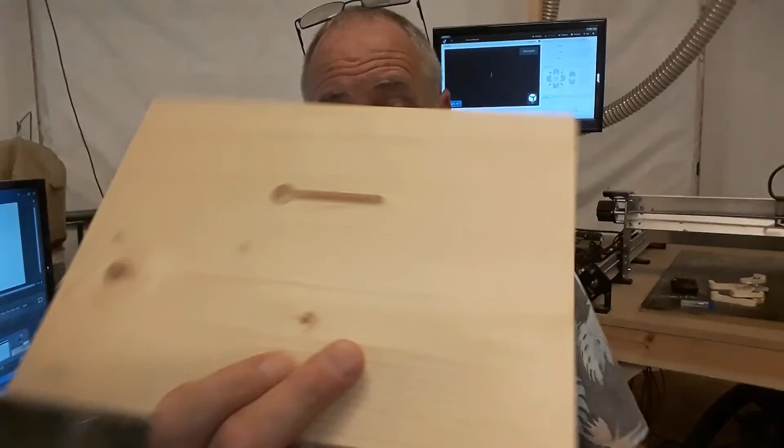If you have a CNC router and you make signs with it that need to hang on the wall, and you need to learn how to make T-slots like that, then that's what you're going to learn in this video today. I'm going to teach you exactly how to design this up and how to generate the toolpath for it, and I'm going to teach you how to get the T-slot cutter into your tool library. You have to get this set up in a separate way. If you don't do it right, you are going to have problems if you try to do this without doing what I am going to be teaching you. And then we're going to take the project and we're going to slap it on the router, and I'll show you how to set it up like that.

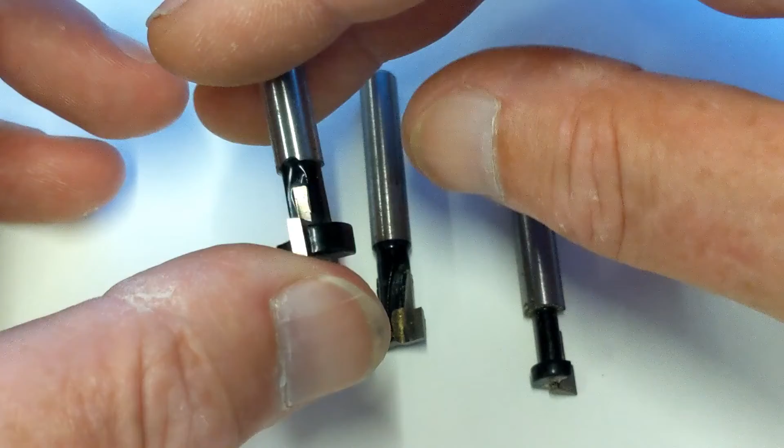Now, there are a lot of different types of T-slot cutters, but for all intents and purposes, we are doing everything with this style here. This came as a set of 3 off of Amazon, and they are ultra cheap, like $10 for the set of 3. They're not high quality cutters whatsoever. These are what I consider throwaway bits. So what you'll notice when you do these, it'll cut a little bit rough, it'll just sound rough. However, if you want to step it up a notch, you're going to be spending $100 or more. So because these are so difficult to find, I am actually talking to my supplier now to actually design these up.

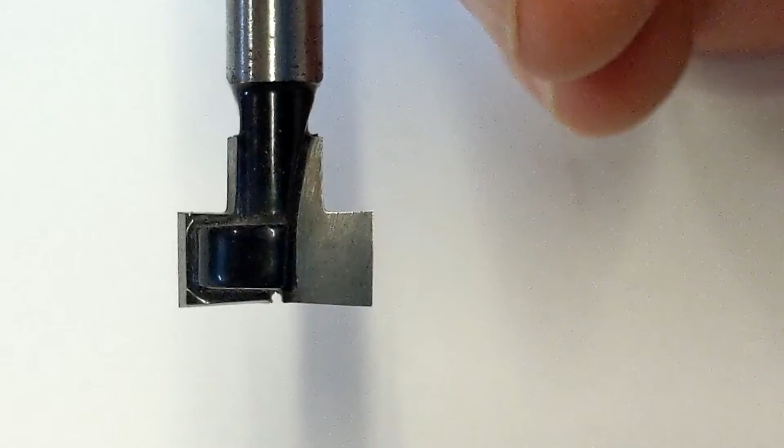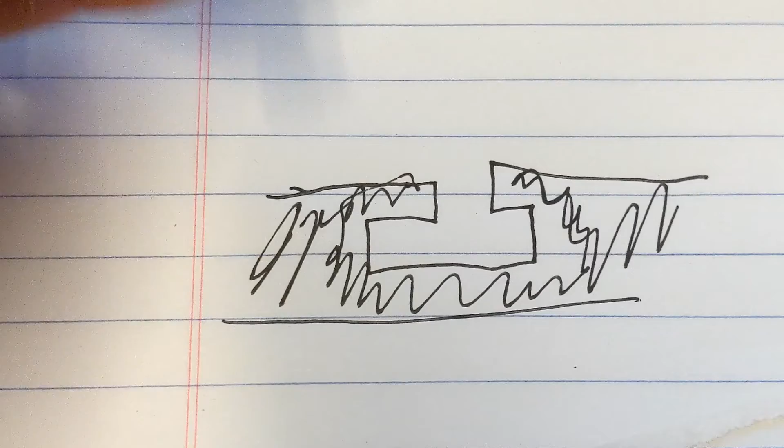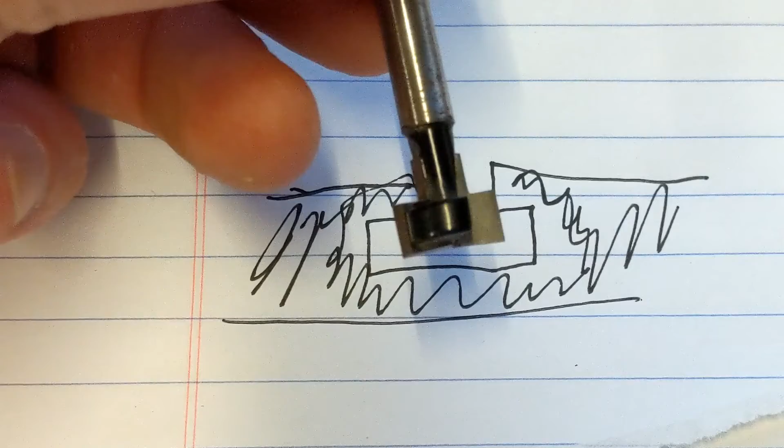Here's the style of this bit. You can see that there are 2 flutes on this bit - there's a flute over here and a flute over on this side. And there are 2 cutting diameters. We have the bottom of the slot, or the wide part of the slot right here, and then we have the upper part of the slot right here. And this is what the slot will look like when it makes this cut. This is considered a cross section of your material, so the scribble area is your material, and that's the T-slot that's been cut out by this bit right here. So it comes down at some point, plunges down to the material, then drives across or cuts across the material, and then it's going to come back and pull out. And that's the way we're going to design it.

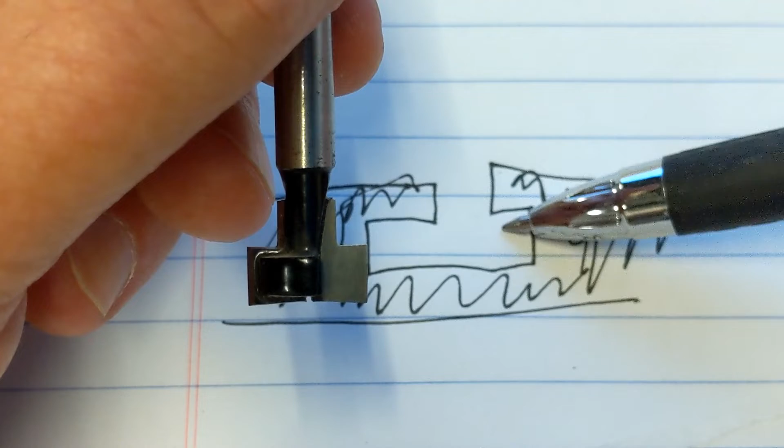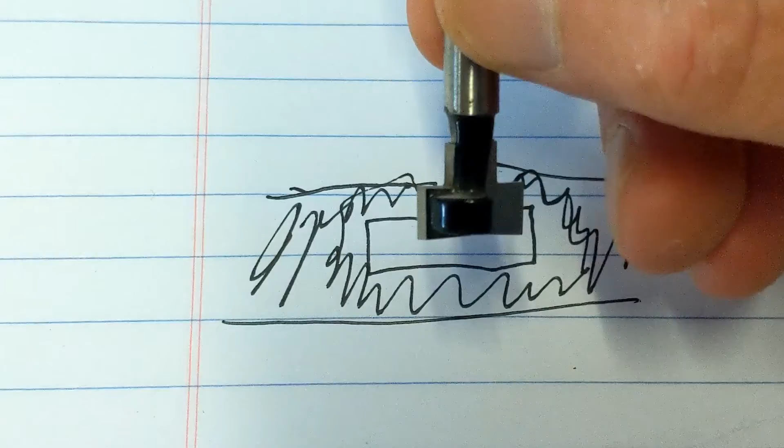But also this is the way this project looks. So what I want to make sure of when you are doing projects like this is this depth from here to here cannot exceed the overall depth of the cutting blades. So you want to make sure that if your cutting blades are, let's say, half of an inch, let's just measure this one up and see what this is. We are roughly right there.

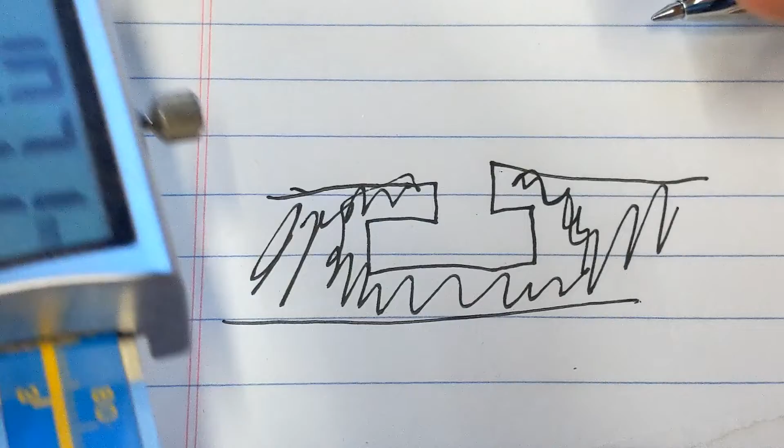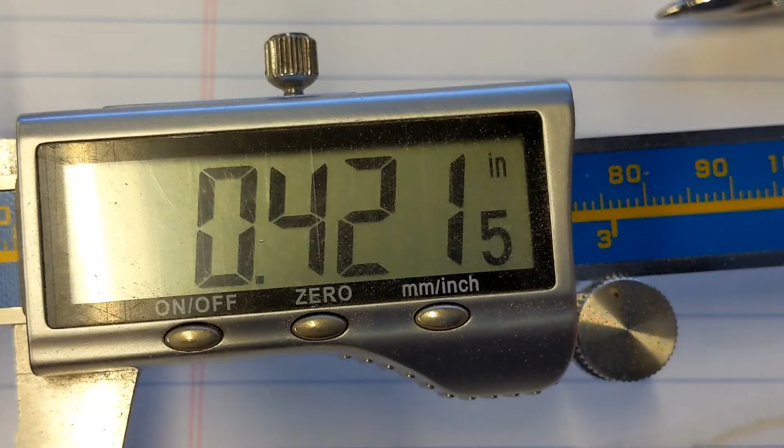So that's 10 millimeters or 0.42 inches. We don't ever want to go past 0.4 inches. This one I always set to 3/8 of an inch deep, or 0.375. That would be about 9 millimeters deep. So that's what we're going to be creating.

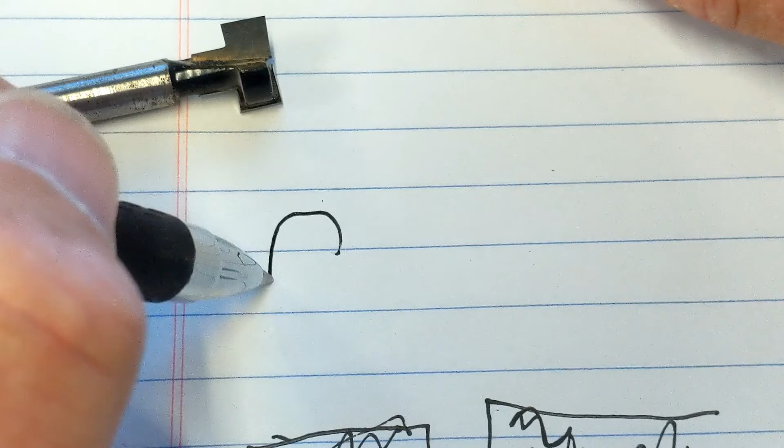Now, if you look at it from the top view of your material, you are going to end up seeing something like this, just like we showed you on that piece of wood. So the bit will come down here, it'll go across there, and then it'll come back and pull back out.

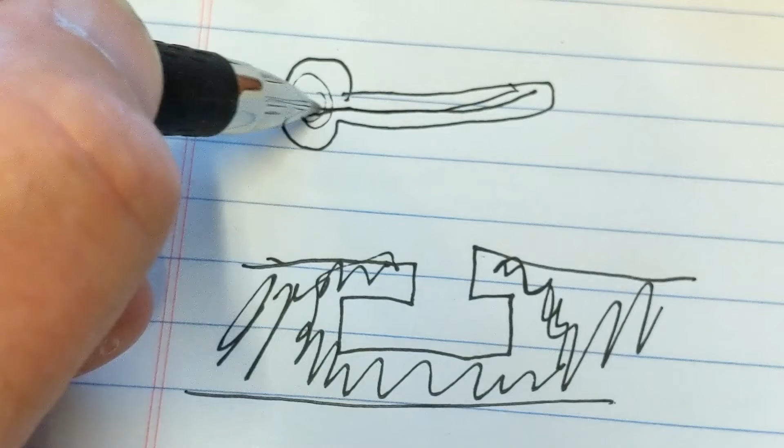Okay, so we're going to dive into the Vectric software and we're going to design it up. It's super easy. And then we're going to get into the G-code, and then I am going to tell you how to get hold of the G-code, and you'll know exactly how to set this up from there.

We are in Vectric, and I just want to remind you, this will work in all variants of the Vectric software, the Cut2D, the Pro, Desktop, Aspire. As far as other softwares go, like Easel, Carbide Create, I honestly don't know. However, the G-code file that you will be able to download, you can work with that and adjust it the way I tell you.

With that G-code file, I'm going to tell you up front, do not download it until you understand what I talk to you about later on and some of the cautions I want you to take.

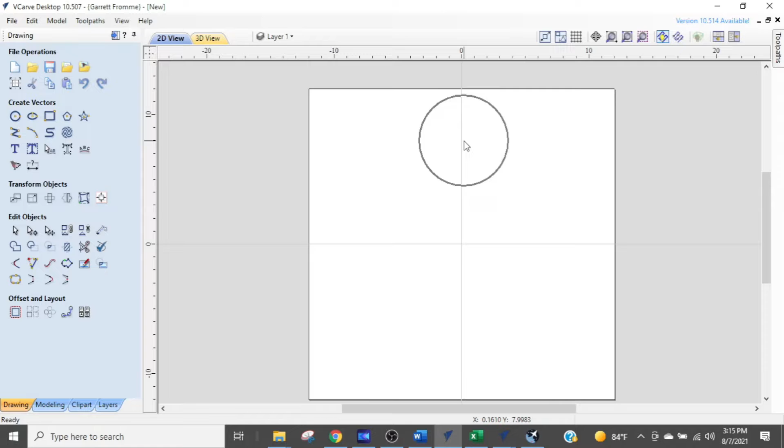Alright, so let's design our slot. Essentially the way we're going to design our slot is we are going to design it off the middle of a 0 point. For all intents and purposes, we're going to create a 0 point on our project, or a crosshair. And that crosshair may be up here on the project, but for the intents of this software, we need to make it where our XY0 meets or intersects. So when you're setting your project up, you want to make sure that you are set up with your XY datum position in the middle.

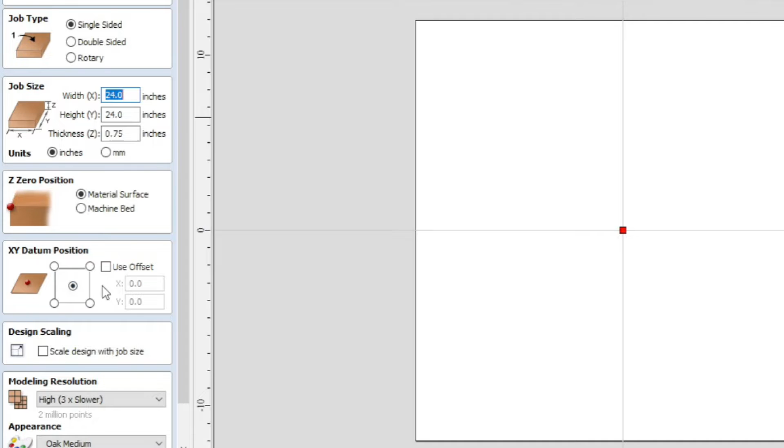Now this project is 24 by 24 by 3/4 of an inch. It doesn't really matter, that's just what I have it set at. Your sign may be any size. It doesn't matter. Use this method to make it as simple as possible.

Okay, so let's just say we want a slot that's going to be 2 inches long. What we're going to do is grab a polyline. That's this tool right here under Create Vectors, the one that looks like a little zigzag. And we're going to select that, and that's going to put us into draw a straight line mode.

Now before we draw anything, we want to make sure our snaps are turned on. Just turn both of them on, and we are just going to let it snap to the horizontal line. You see my cursor, watch it - it has a little plus and a zigzag and some numbers. And when I get to the line, it's going to change into a bullseye. That means we are snapping to that horizontal line.

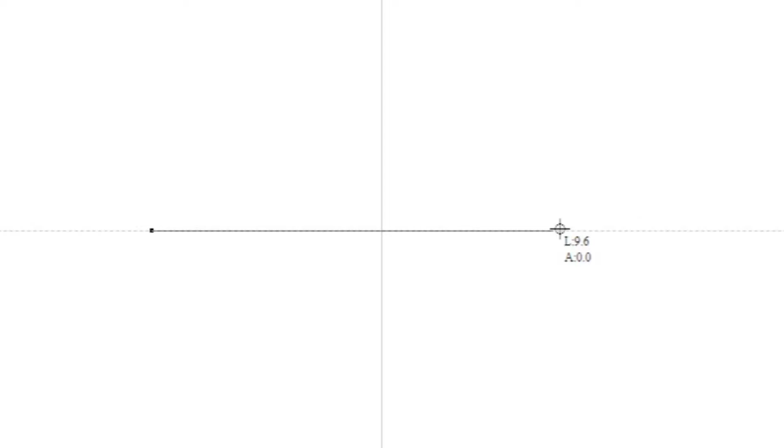So while we have the bullseye, click your left mouse button once, and now it has grabbed a point. Then we are simply going to pull straight across while that line is straight. You don't want it like that - you want this to be snapped onto the line. So you see my cursor again has that crosshair. You want that crosshair to be there. On our keyboard, we're going to type in 2 and then enter. And what we just did is we created a 2-inch line.

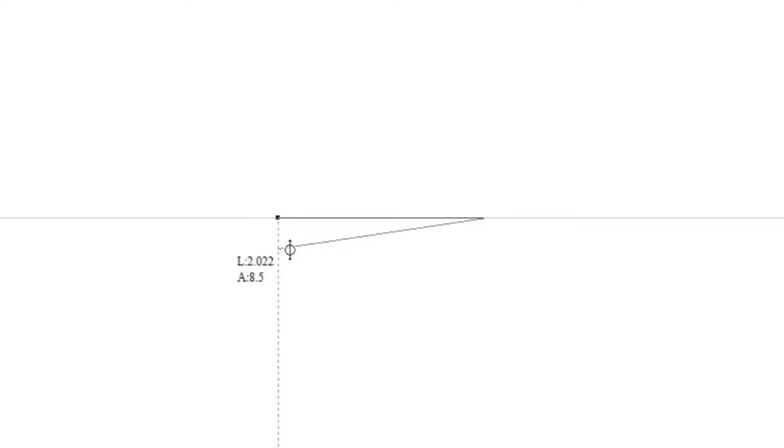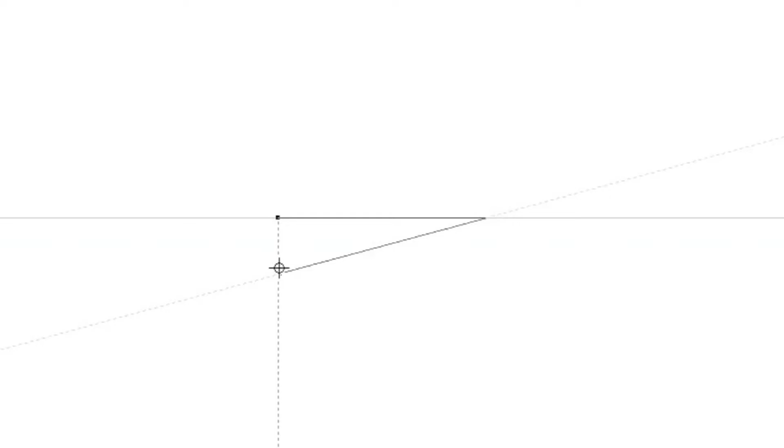Now we're going to zoom in a little bit to this line, and we are going to move backward to the other one. It's going to turn into - you're going to see we get changes in our cursor. What we want it to do is, first of all, you see just above my cursor, that line has a little black spot on it. That means it's snapped to the reference of the end of that line. So you can see I have a dashed line there. That dot indicates that we are perpendicular to that line right now.

Wherever we click, we are going to be on that dashed line. But what we want to do is be all the way on the line there. So we want to turn back into a bullseye, and we're simply going to click right over that. The other way you can do this is just come back over it, type in 2 again, and enter, and now our line has come back.

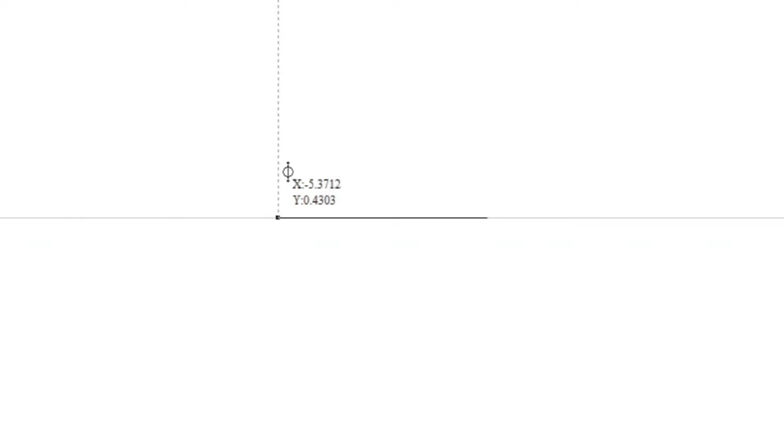Now you'll notice something, that the software by default stopped drawing a line. What we have is basically a line that's drawn over top of itself. Vectric for some reason just quits at that point when you do that, which is okay because that's exactly where we want it to quit. So now we're going to close this box, and we're going to come from the upper right or lower right, and we're going to hold our left mouse button down and just create a window so we can drag across that line and let it go. So you see now that that line has been highlighted.

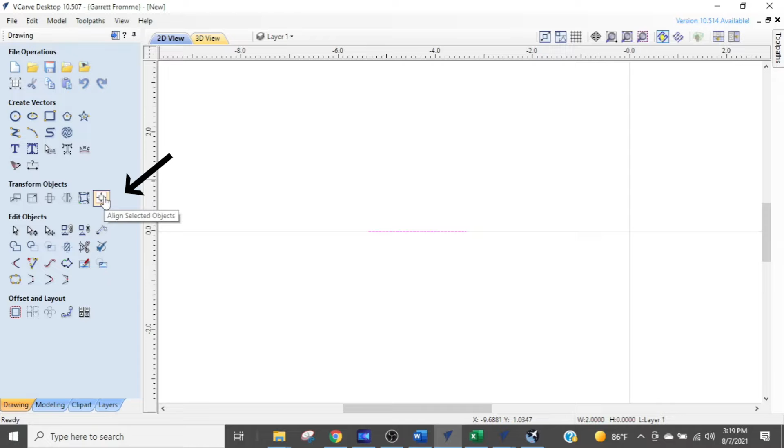What we want to do now is center that line on the 0 point. Very simple to do. You go under Transform Objects and select the last icon, which is align selected objects, and then pick the upper middle one, which aligns it to the center of both up and down of the project.

So we click that, and the line has now moved over into position. Close that, and our T-slot line design is complete. It's that simple. I'm going to run through this one more time.

So what we're going to do is just delete that. Right now you see it's highlighted purple. I'm just going to hit the delete button to eliminate it, and I'm going to do it a little bit differently this time.

We're going to grab that polyline again. We're just going to come somewhere here in the middle, and we are going to snap with our left mouse button. And we're going to come across so we have that dashed line that goes all the way through the line and goes off to both sides and ends of the screen.

We're just going to come over that way. We're going to hit 2 and enter, and then we're going to come back the other way, and you can see both - there's a dot here and a dot will be here, and we're just going to go past them. We're going to type in 2, enter, and that line is done.

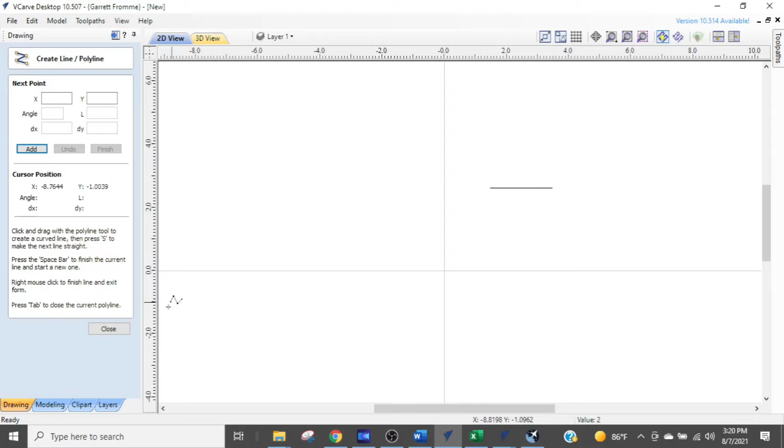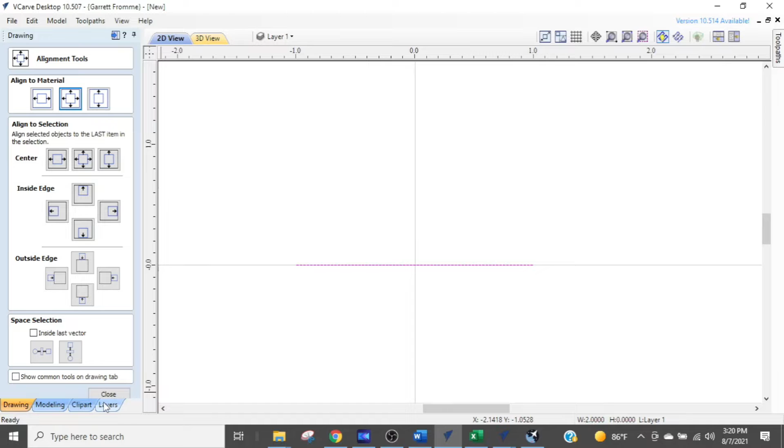So we can either close this or hit the escape button, and I just hit the escape button. Now we're going to highlight that line, and we're going to go to align selected objects under transform objects. Click that, and we're going to click that center button, and now our line is in position right here. So we'll close that, and we are ready to turn it into a tool path.

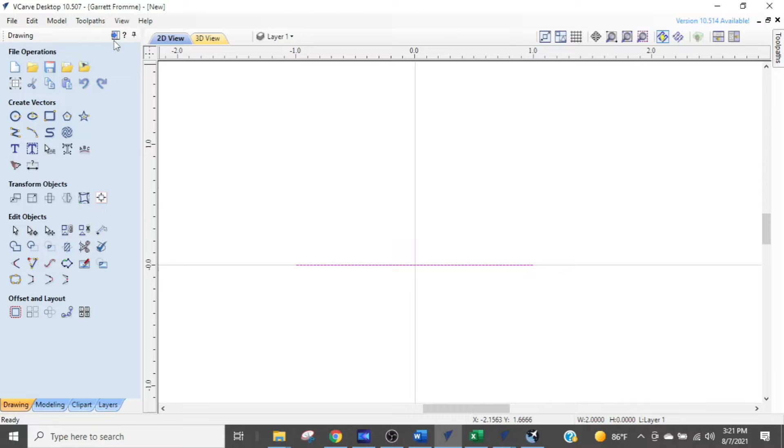So what we're going to do is we're going to switch to tool path. One of the things I want to warn you about right now - I've done many one-on-ones with people who are just getting into this, and they often are in the habit of, instead of switching from design mode, which is to your left, to the toolpath mode, which is on the right, by virtue of this switchover button right here, they use this tab, this pull-out tab right there.

Now this is meant to be there for a temporary fix on something. I strongly recommend that you don't do this, because you have two completely separate elements exposed at the same time. You have toolpath generation, or CAM, computer aided machining, and then you have CAD over on the other side, computer aided designing. They're two completely separate animals.

So I'm going to strongly recommend that you do not use this tab up in this upper right corner, but rather use this blue arrow to switch out of the CAD side and into the CAM side. So I selected that button, and you see on this side there's another blue button there. You click that, that will take me back to the CAD side. So I'm going to go back to CAM.

And you can see our line is selected. So what we're going to do is cut this on a profile. Now before we even run this tool path, we have to set the bit up in our tool library.

T-slot cutters are set up a little bit different, and they're a little bit interesting. If you don't follow along with this and try to figure it out yourself, you'll probably get a little confused. So we're going to set that up right now, and you're going to learn how to set up T-slot cutters in your tool library. So let's go.

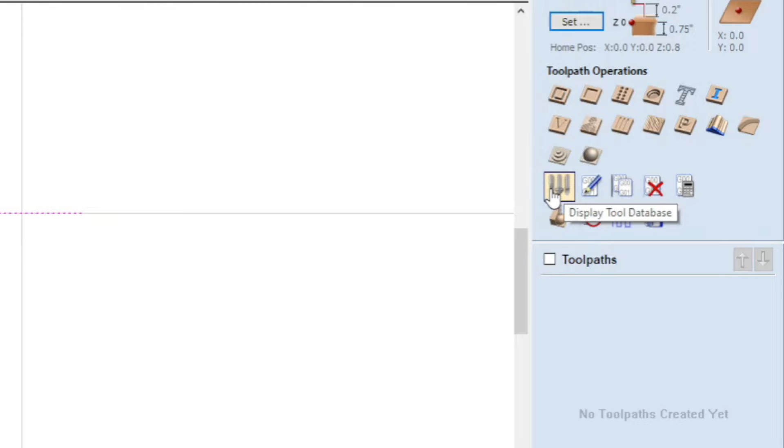So we're going to go to our bit library, which is this button right here, and it says below it display tool database. So select that, and there is our tool database. One of the first things we want to do is set up our T-slot cutters.

Now there's a little thing I want to show you that's going to make you question things, but once you understand this, you won't question it anymore. I'm going to just select an end mill here, any one, and you see it comes up with this field called tool type. Next to it is a pick box or drop down box, and inside it talks about all the different router bits, the different types, but there is no T-slot cutter. So we have to come up with an alternate plan to solve this, so we know that we're dealing with T-slots. We are going to treat a T-slot like an end mill.

So I'm just clicking out of that because I don't want to mess with that one.

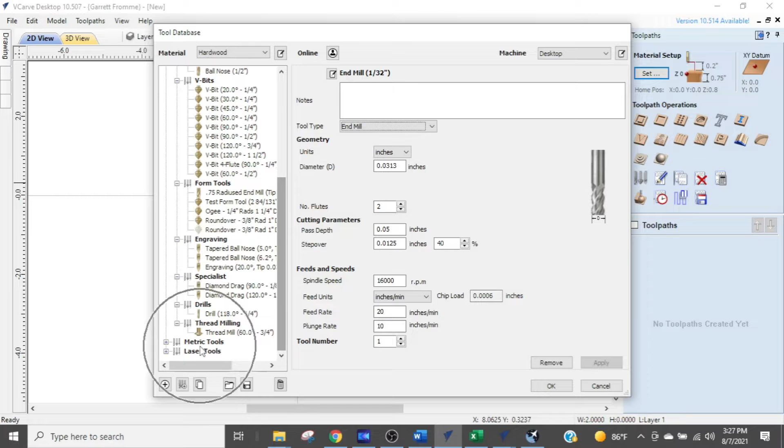What we're going to do is go up to the top field where it says Imperial Tools in inches. If you're in metrics, you'll go down the list until you get to your metric tools down there, and you'll do the same thing. We'll select that, and we are going to hit the second button that says Add Group.

When we select that button, if you watch up here, it's going to give us a new group. I'm going to push it once, and now it's titled new group, and added that, and there's nothing in it. You see under end mills, there's a whole bunch of end mills here. Under new group, there's nothing, and it says new group.

So we're going to simply come over into the name field and change that to Tslot Cutters. And then we're going to go down to the bottom and click the apply button. And now we have just changed the name to Tslot Cutter.

So now we need to add a bit into it. That's very easy. All we have to do is grab a bit from anywhere in here, and we are just going to select the 1/4 inch end mill. We're going to use those defaults, and we are going to come down to the bottom and duplicate that bit. So I'm going to select duplicate, and now it's just made a new one.

What I'm going to do is simply drag that up under Tslot Cutter. I just click and drag, and now it's there.

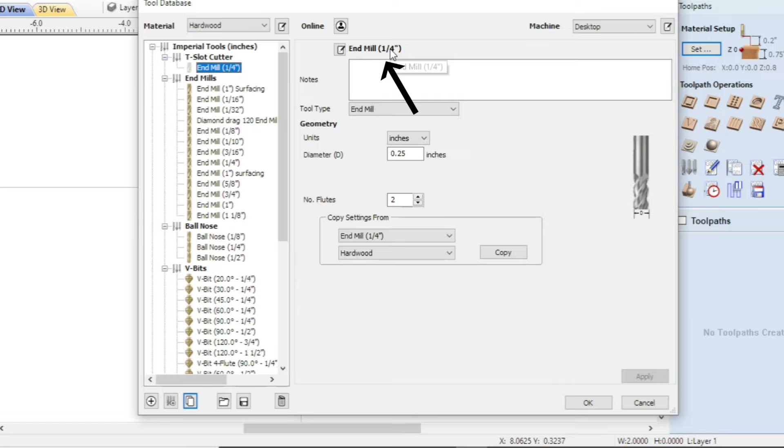So we're going to start right off at the top and get this set up. First of all, we're going to change the name of it. So where it says end mill 1/4 inch, we know that our cutter is a 1/2 inch by a 1/4 inch. So it's a 1/2 inch wide by 1/4 inch thick.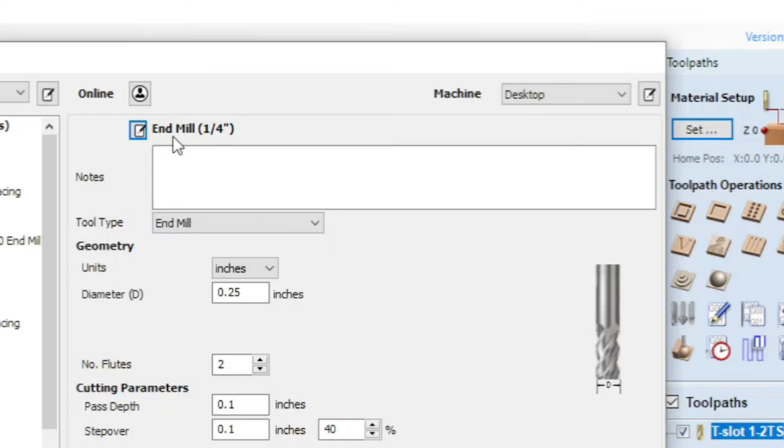So in order to change this information, we need to select this little box right here. This will allow us to edit this text so we can change it to Tslot Cutter and what other information that we want it to say. So when you click it, you're going to get this dialog box, and we are going to change it.

So basically we're just going to say it's a 1/2 inch Tslot Cutter, and what we want to do is, you see where it says units, we want to leave that alone. We are going to go outside of the diameter area, and where it says tool type, we're simply going to overwrite that. We're going to delete that in the brackets, and we're going to say T-slot. And we're going to say OK.

And now it says Tslot 1/4 inch. So everything is perfect right now. But our T-slot is actually 1/2 inch. So you see where it says diameter here, we have a 1/4 inch.

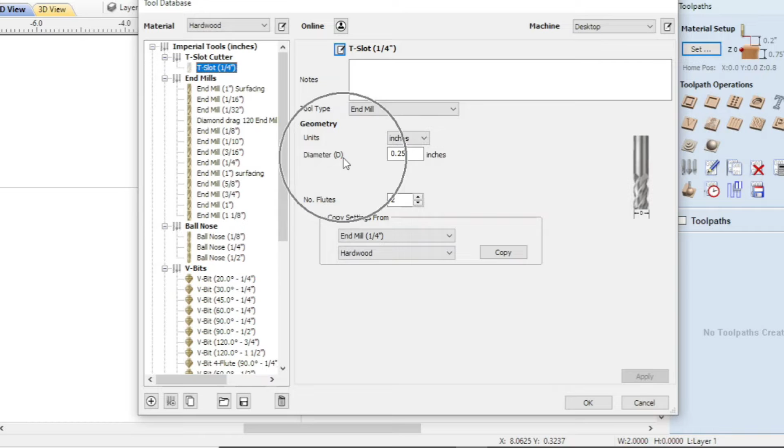We're going to change that to 0.5, and click out of it. And now that number is changed to Tslot 1/2 inch. Number of flutes is 2. We're going to just click the copy button. What that's going to do is take that original 1/4 inch end mill data that we had, and it's going to punch it into this lower set of data fields.

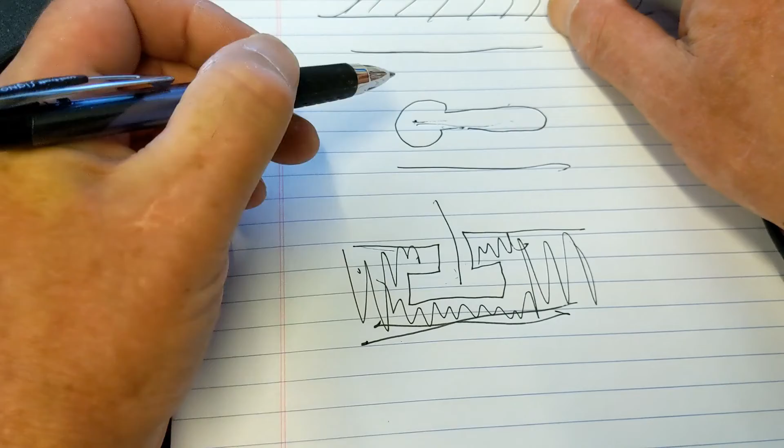So we're going to change things around a little bit. The first thing is, how deep do we want this Tslot Cutter to go? Now remember, we have to actually dive down in and move across the project and then come back. Like here, we have to go down into the project, go across, and then come back again.

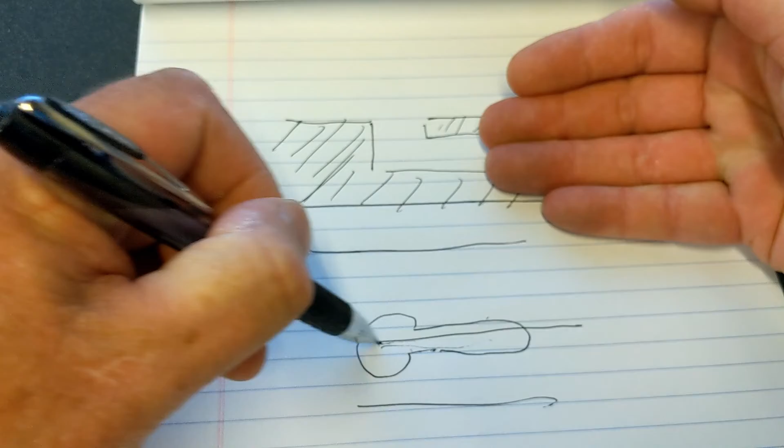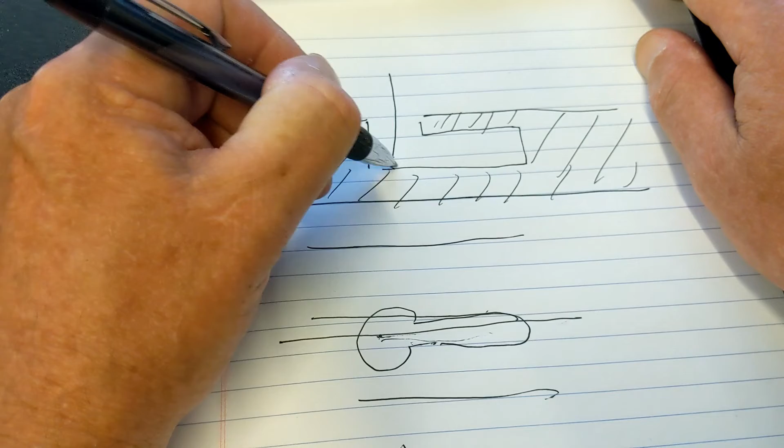So we have this kind of contour inside our project. If we were to take this and turn it upward like that and cut it in half right across there, or roughly there, we'll cut it right across there. This is what we're going to have. So that bit has to come down to here, to this level, the bottom of the slot, move across to some distance right over there, and come back again and come out. So we have to figure out what is this depth from here to here.

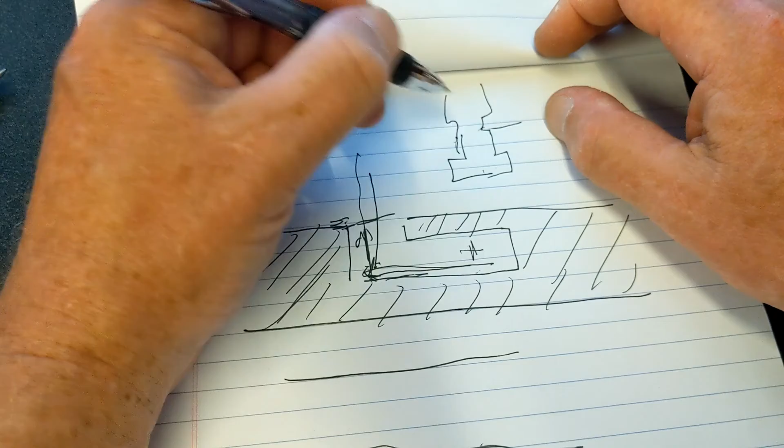Now with the bit that we are going to be using, it is like that, and this is the cutting edges. That is a 1/2 inch. So we're going to go 0.375.

So what we have to do is fix the pass depth so that we get that 0.375 in one shot. For this cutter, the pass depth is going to be 0.375. We want it to go to the full depth in one time.

Now step over, we are not even going to be referencing step over on this, but I would set that at 1% just to be on the safe side, because we won't be using that function. But if you accidentally have this bit selected, it'll only step over just a tiny bit and not cause any issues. Now the spindle speed for this bit is going to be 16,000.

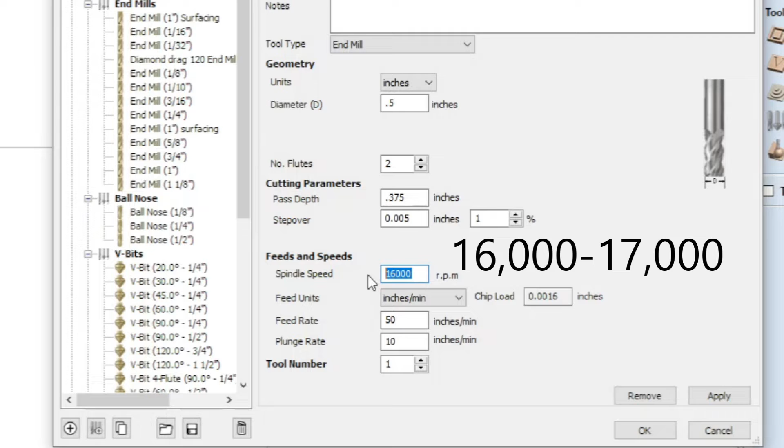or 17,000. If you have a Makita router, then it will be approximately 3 on the dial. All right, so feeds in inches, we are in inches per minute. You would be in millimeters per second. I will provide all this feed and speed data down below to have your thing set up, and we'll add that to the feeds and speeds tables in the next release.

Okay, for feed rate, we are going to keep that turned down a bit. We are going to go to 30, and the only reason I'm keeping that down is because this is not a good cutter. So it's going to cut a little rough. Normally I'd probably cut it at about 60 inches per minute.

And then the plunge rate, we want this to be a little low. So 10 is okay. I'm actually going to go a little shallower, a little slower, 8. And we are going to apply.

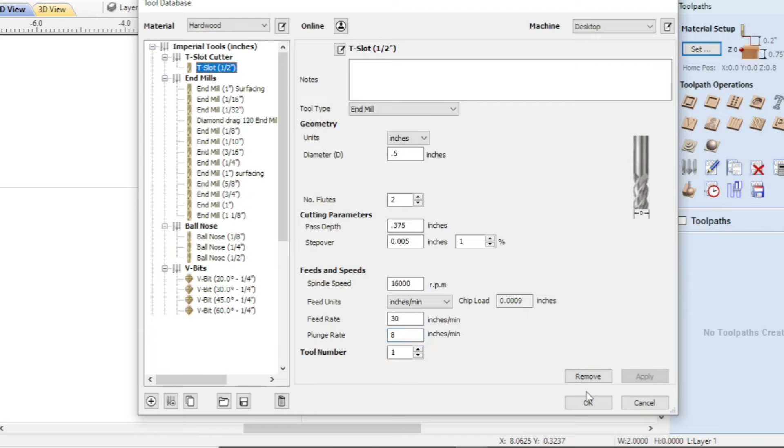Select apply. And okay, well, we don't have to do okay yet. We know we've got it up there in the T-slot cutter, and it is shown up as the T-slot cutter 1/2 inch. So we can select okay, and that bit is in there now.

Well, you've just learned how to set up a T-slot cutter in your Vectric software. If this did not make sense to you, go back and watch this again. You have to set up T-slot cutters the right way. Otherwise, you will have problems on your projects when you try to cut them, especially when you're using the 2-stage T-slot cutters that'll cut both the slot and the little T-shape inside.

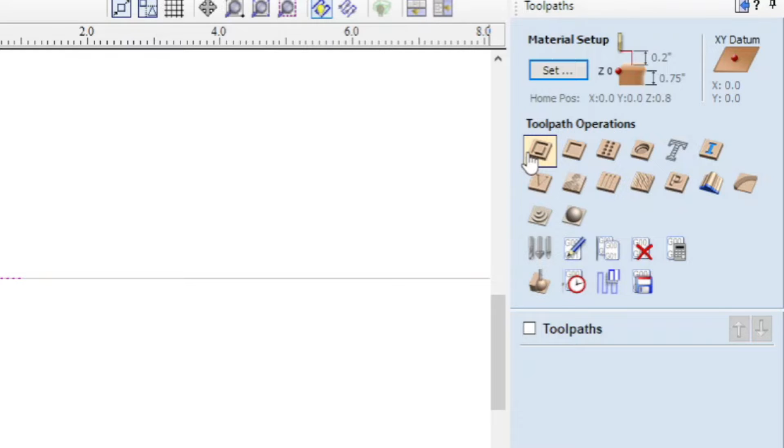All right, let's go. So now we're going to actually cut our T-slot. So we will cut it on a profile cut. Very, very important. Do not use pocket, do not use Vcarve, do not use anything else but a profile cut. We want this bit to cut along the profile of that line and go back. So we select that profile cut, and our depth of cut is going to start at 0 and it's going to finish at the depth we want to go, which is 0.375.

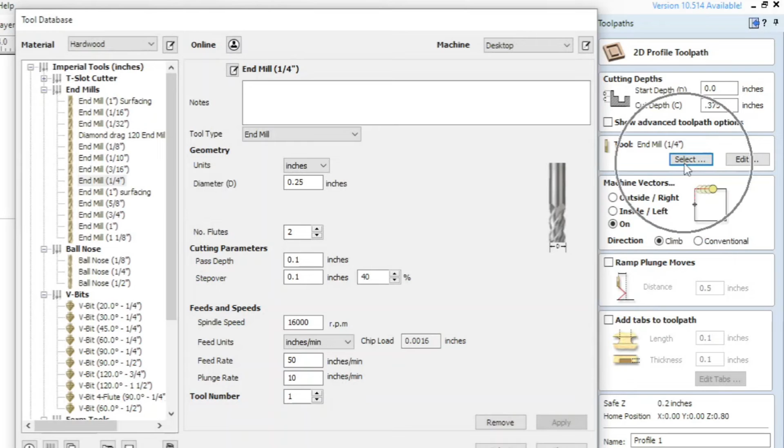And we're going to change our bit by hitting the select button, and we are going to select the T-slot cutter and click select. That cutter is now set up. We want to make sure you are on the line. It won't work if you don't select on the line.

As far as climb and conventional, these don't matter. It can be either one. Do not have your ramp turned on. This box must not be checked.

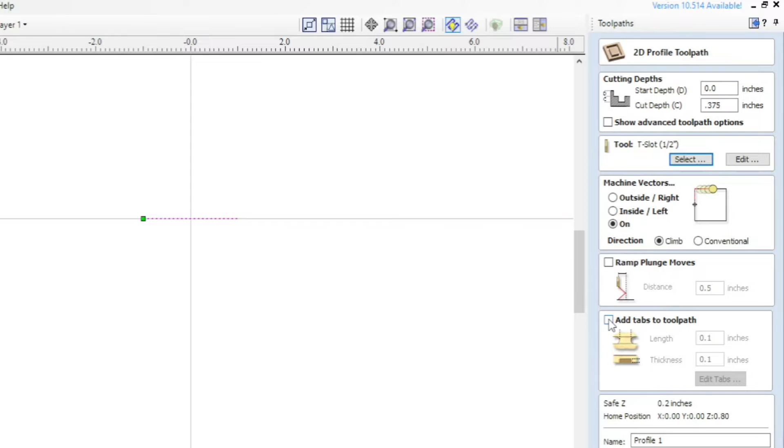Do not check add tabs. We're going to change the name of this to T-slot. So we'll say T-SLOT, then the name of the bit. We'll call it 0.5, or we'll do 1-2 TS. I'll call it TS for T-slot, using caps, TS. Then we'll say calculate.

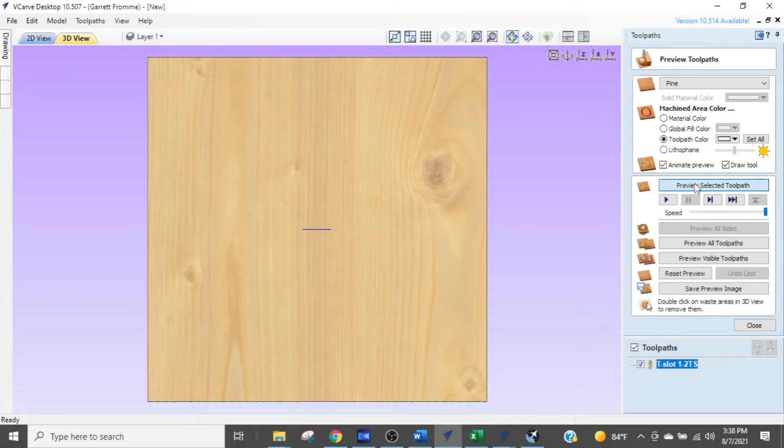It's very easy, but now you get to see the shortcoming of Vectric. It will not take into account that this is a T-shaped bit. So when we run it, make sure the T-slot cut is selected, and we select the preview selected toolpath. You can see it just made a slot, but not a T-slot. That's because Vectric does not work well in this type of 3D environment.

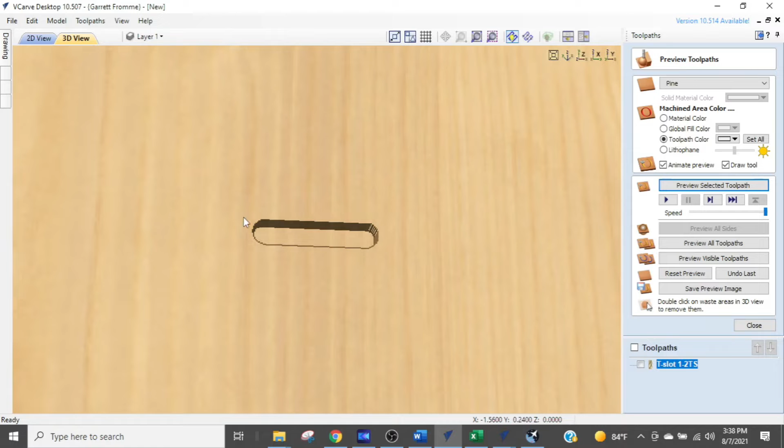We could probably get it to work if I did a couple other things, but we're not going to do that. Just know this is okay, but we want to make sure it's actually going to work right. Back in your run area, there's a slide bar. We'll move it to the middle, reset the job, and do it again. You'll see it cut across, but we didn't see it come back. This is a shortcoming of Vectric.

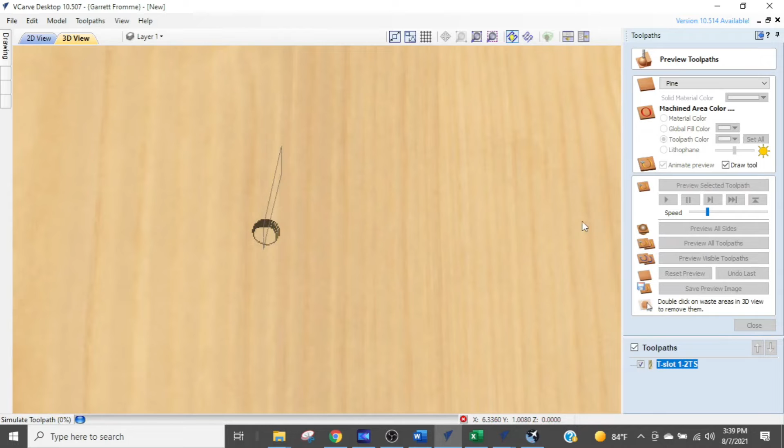What I wanted to see was the bit come down in. I'm going to run it again so you can see, slowing it down some more. So you saw the bit started here, ended here, but didn't go back to here. This is a shortcoming in Vectric.

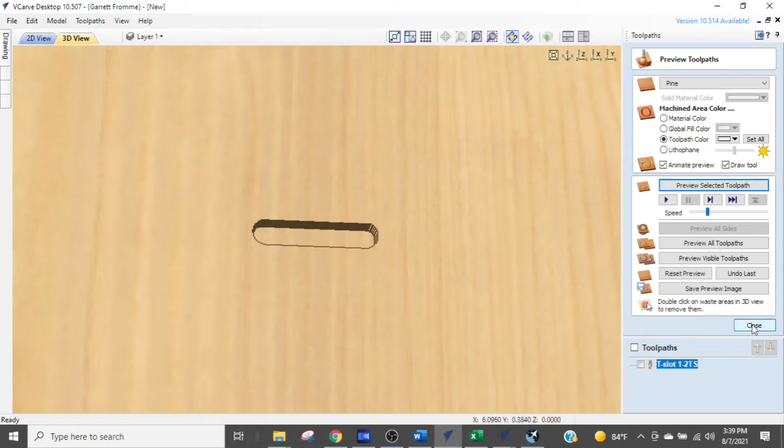But we're going to verify this in the G-code file, and this is where it's really important to make sure you have this G-code file set up right. We'll run through that now. First we create the G-code file, select close, and then save this.

Right now I'm using a Long Mill CNC router, but I find the Bob's CNC G-code generator post-processor works just fine, so that's what I'm using. It creates very basic G-code, so we select the toolpath and save it. We select Save Toolpath, and I'll save it to my Downloads folder for now.

I have the name of the bit listed right there—it's T-slot, 1-2TS, so that's half inch TS. What I'm going to do is delete everything but T-slot, and save it. Now we're going to open that up.

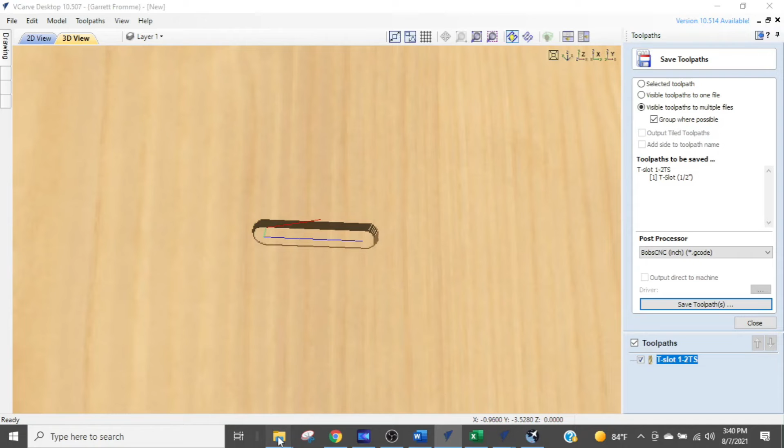We'll go to the directory where we saved that, which should be in my Downloads folder, and there it is. Now remember when I changed the name a little and took out the 1-2TS? That's because Vectric will automatically put your toolpath name into the file. So if you have multiple toolpaths, always take out all the information except what it is. All I had left was T-slot, and it plugged in T-slot and the name of the toolpath. So with multiple toolpaths, it creates G-code files for each one with this extension name onto it.

The extension on this came in as G-code right there—yours may come in as NC or TAP. You need to be able to open it into a Word document so you can fix it appropriately if needed. So what we're going to do is simply open this in Notepad, not a Word document, but Notepad. And this is what it looks like—very simple G-code, with simple instructions up front, and then it tells me it's going into position.

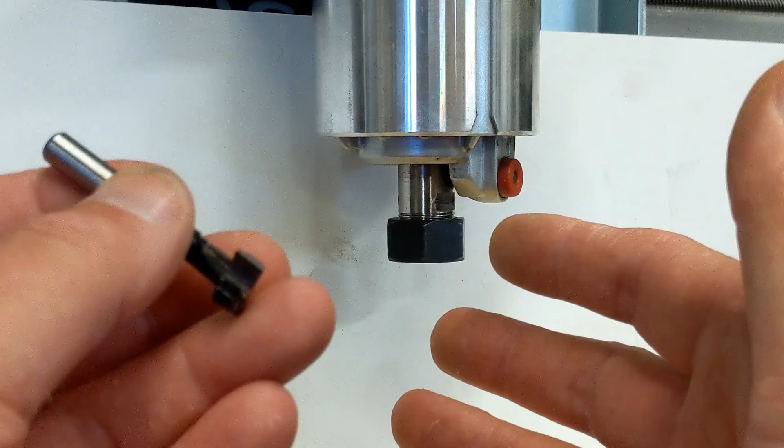Let's go. I'm going to give you a couple of tips here that a lot of people don't get, and it ends up creating a lot of problems for them. So number one: whenever you change a bit in a router, you should take that nut off, pull the collet out, and blow out any sawdust that's in there.

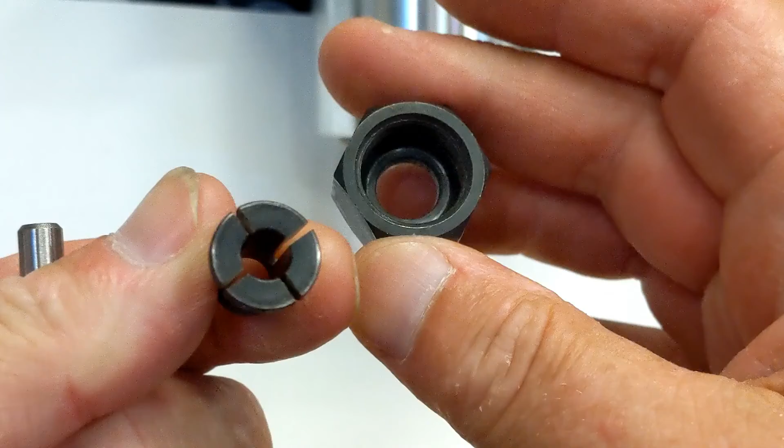Now, I've already cleaned mine out, but the reason is because sawdust acts like a lubricant. While your router is turning and making a cut over a long period of time, your router bit has a spiral to it for the most part, like down cuts or up cuts, and there's a force that's either up or down. If it's an up cut, it's trying to pull itself into the material. If it's a down cut, it's trying to push itself out. Over time, it will slide and move, and you will have uneven surfaces. So make sure you clean out that collet.

Now, the second thing I want to point out is this is a Makita router, and it's got that little locking pin. That locking pin is here for one specific reason: it is here to hold your shaft from spinning while you're just getting the router bit in the router. This is not designed to take the force that you are going to be applying with your wrenches. I've seen too many people ask why this part of their router broke. That's because they used a wrench, held the pin in, and then used a wrench to tighten the bit down, and that housing broke. This is aluminum. It's not strong enough to handle that.

Okay, I can't stress that enough. Do not use this pin when you're tightening your bit. You're only going to use it while you're setting your bit in there.

So I am putting the nut on, and I'm going to set the bit in about halfway, maybe a little bit more. I'm holding the pin down, and I'm going to turn the nut, because if I don't hold the bit, it's just going to slide. So I'll just hold it like that and turn the nut, snugging it until the bit won't move. This is why you have two wrenches, not this pin right here.

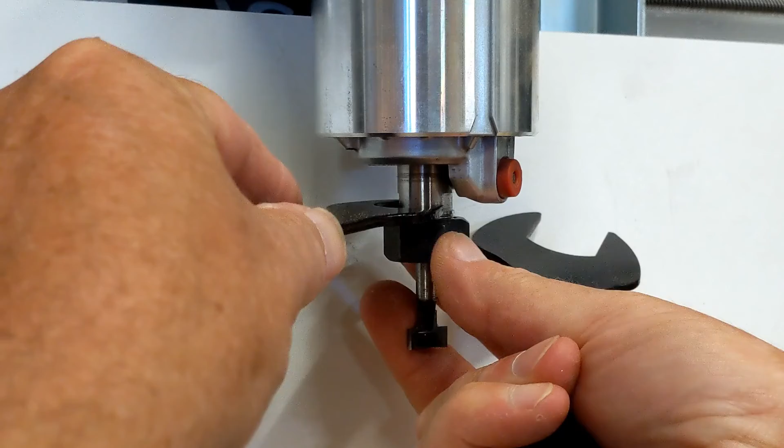And that's why you have the slot on your shaft. We will give it a good snug. There we go, you don't need to over tighten. Okay, well, there we have it. I can't stress this enough: do not use that red pin as part of your wrenching when tightening down your bit.

You will break your router. Use both wrenches. All right, so what we're going to be doing now is we are going to set this bit using the touch probe on the Longmill, what they send with their machine, and we're going to be doing it with the GSender software. Now, you're going to learn a lot of features about the GSender control software here, so you want to stick around. You're getting a lot more than just T-slot in this video.

So what we're going to do is just get in there and zero out this bit, and I'm going to show you exactly how to do it. It's so easy once you get the hang of it. Let's go. Now, in this case, we are going to use a center mark for our slot, and we're going to cut that way. Just a word of wisdom for you: try to make your slots with the grain of the wood as opposed to across the grain.

It just cuts much easier that way.

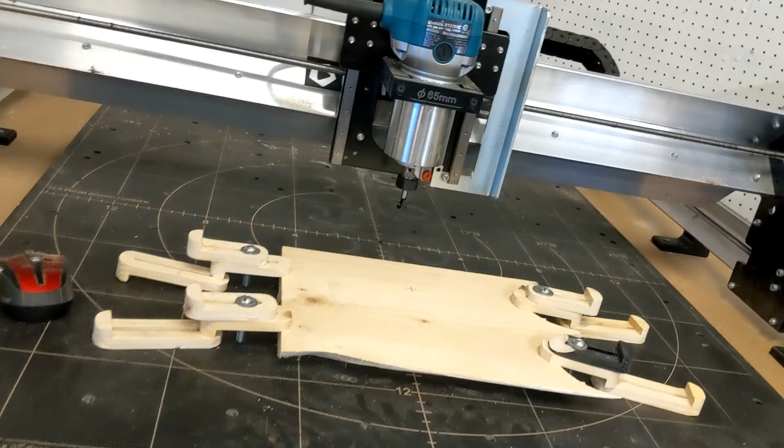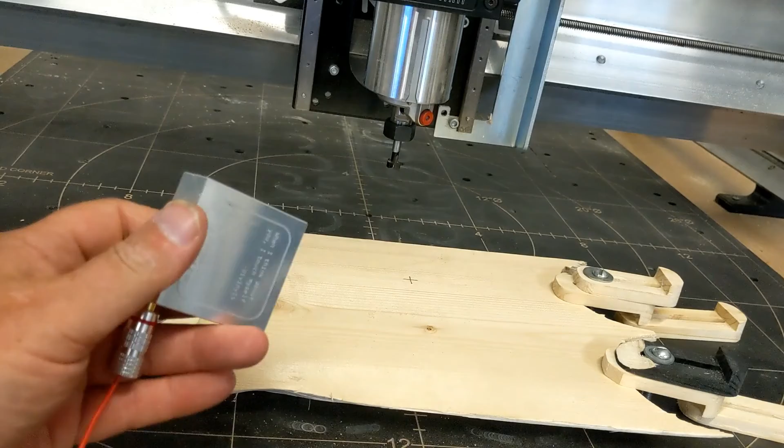I have a Longmill CNC router, and I really like that the gSender has a built-in feature for their touch probe. If you ever get a CNC router, make sure you get a touch probe with it. The combination of the Longmill and the gSender software makes it super, super easy.

So what we're going to do here is set our zero. We're going to use the touch probe to set Z0 on the surface here, and the software knows to compensate for the thickness of this plate.

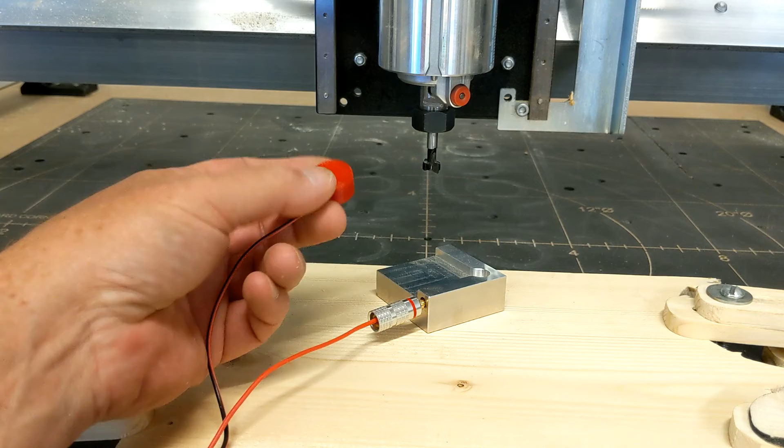Here's one of the cool features of the gSender software: it will not allow this to run without making sure everything is hooked up properly. This bit will come down and touch the material and close the switch, giving electrical conductivity through it. That tells the machine control it is at 0. But you can only get that if you attach your probe to the other end of the bit.

So let's go ahead and set this up. We're going to bring this over to somewhere around this position here, set up that 0 real quick, and then set our X and Y 0. So we're going to jog the bit down relatively close to the touch plate, maybe about 10 millimeters or a half inch above, somewhere like that.

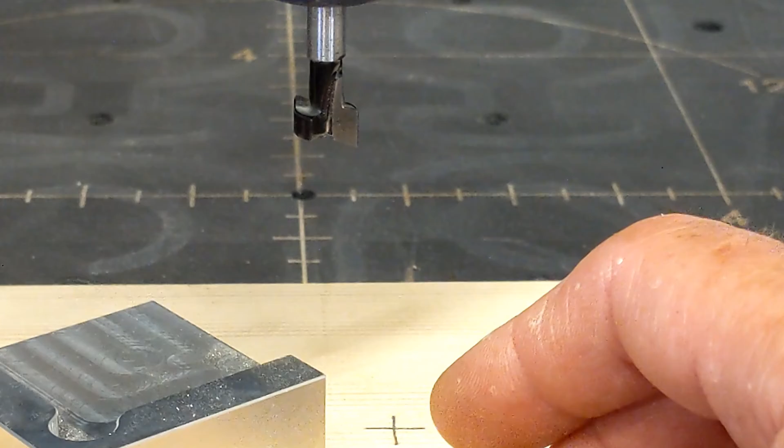I'm going to set the touch plate off to the side. We're not going to have the magnet on there at the moment, just want to eyeball it to get it relatively close so it'll be out of the way.

Now we're going to get into the control software that runs your CNC router. It's called gSender. gSender is something you have to have with your CNC router, or similar control software. I just happen to be using gSender, which I totally recommend. It's the newest, most robust, most up-to-date, and has the most features relative to all the other ones.

As I said, it's a free download you can get off the Longmill CNC website. They are actively working on it, so you're getting the most up-to-date control software, and it's so easily laid out.

I am creating this video as if you are still really new to this, so I'm going to introduce you to the gSender software as an overview, and then we'll get into positioning this router the way we want with the T-slot cutter bit. So let's get into the gSender software and learn some more stuff.

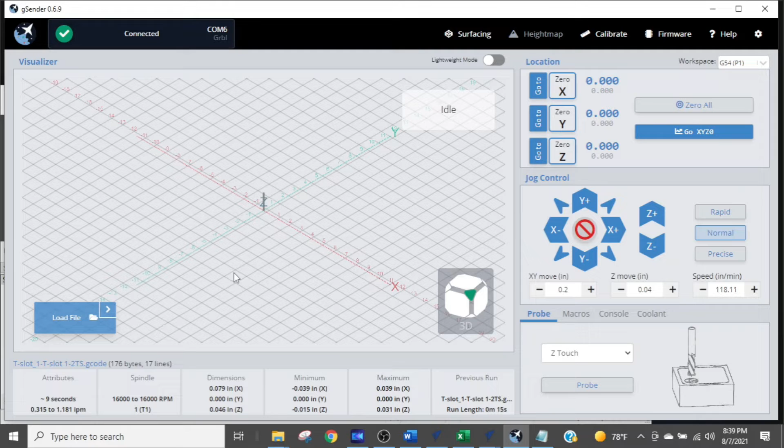All right, so let's talk about what you're looking at here. I will do another video that deep dives into this. This area over here is the display area where you can actually see what your router is supposed to be doing. And over in this area it tells you your X, Y, and Z positions, and is where you set your 0 values right here, here, and here.

Down below that is the jog control. The jog control allows you to manually move the machine around the way you want to. You have quite a few different buttons: the Y plus and minus buttons. Y minus is always toward you, considered the front of the machine. Y plus is away from you. X plus is to your right and X minus is to your left. Z is up and down, Z plus is up.

Z minus is down, and then you'll see a couple other arrow buttons around the side. That allows you to move it diagonally in the XY directions respective to the buttons on either side. And then you've got some speed controls over here where this will allow or control the jog distance.

You'll understand that in a little bit. And then down here are some other controls where you can run your probe, enter manual data, insert macros—that's a little bit more advanced—and there are other features as well. gSender has a lot of features, but I just want you to get the layout here.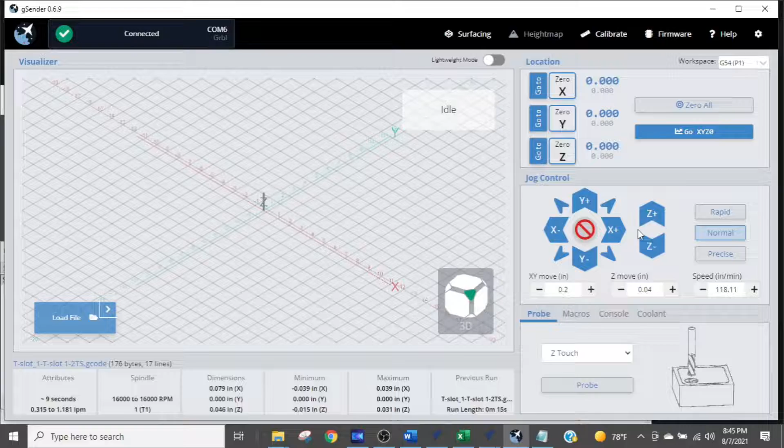So what we're going to do is move the bit down closer, and the way we're going to do that is by hitting the Z down button.

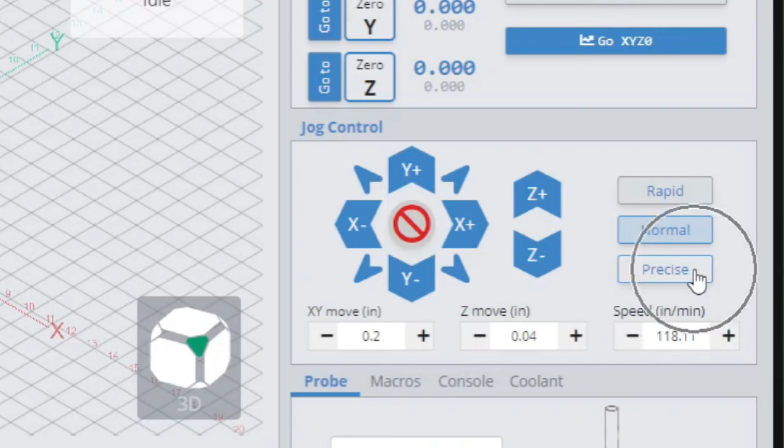First of all, we want to set up our displacement, or how far it's going to move. You see there are 3 buttons over here: the top one says rapid, the middle one says normal, and the bottom one says precise. Basically, rapid means it's moving a long distance. It should probably be reworded to long jog, medium jog, and short jog.

So when you select a button, you're just telling the software that whatever is set in the fields below, that's the distance it's going to move. So rapid is actually a longer distance.

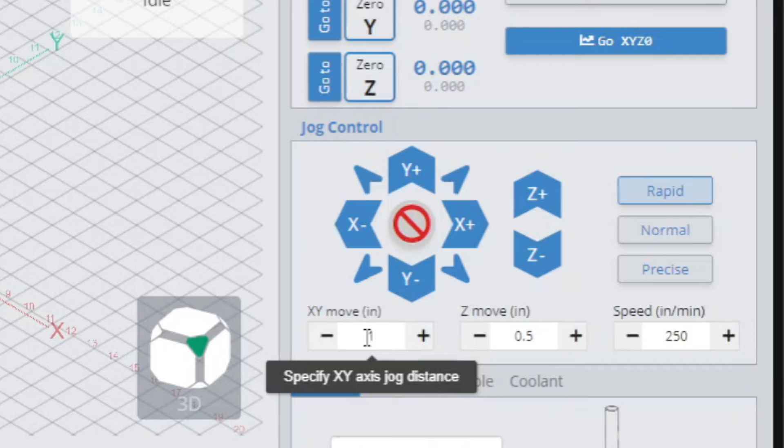Right now it's set to 1 on the X and Y. So if I click any of these buttons, it's going to move 1 in the X or Y direction. If you press an arrow, it'll move 1 in the X and 1 in the Y at the same time.

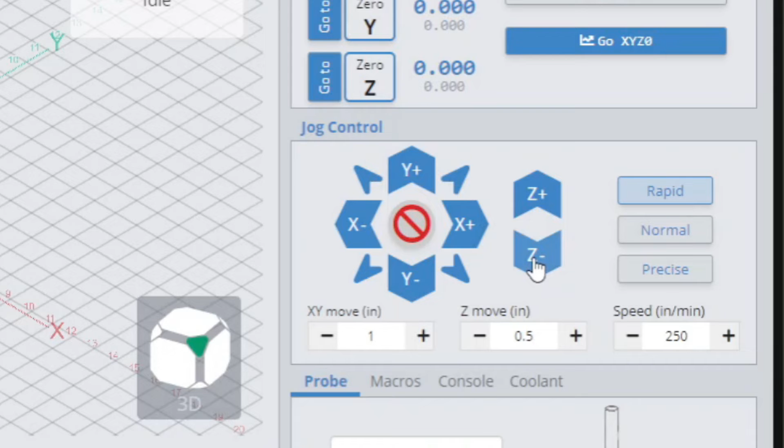For the Z, it's usually a lower value, and in this case it's 1/2 of an inch. So if I click this button right now, the Z will move down by 1/2 of an inch. We're going to click this right now to get it to move down closer to the material.

So you see we got a bit of a move out of that, and this Z plunge is set at 1/2 inch in rapid mode, and I know I have more than 1/2 of an inch. Now 1/2 inch is about 13 millimeters, so we're going to hit that button one more time.

And now we are relatively close. I want to get a little bit closer, but this time we don't want it to go down by 1/2 of an inch.

So we are going to go from our long jog, or rapid button, down to our normal, or medium jog. That changes our movement for each button push to 0.04 inch, so we can nudge it down. We're going to do it a couple times until we get to a distance that we like.

So we are currently maybe 1/2 of an inch. That's good for me. So now we're going to set up to probe the Z height.

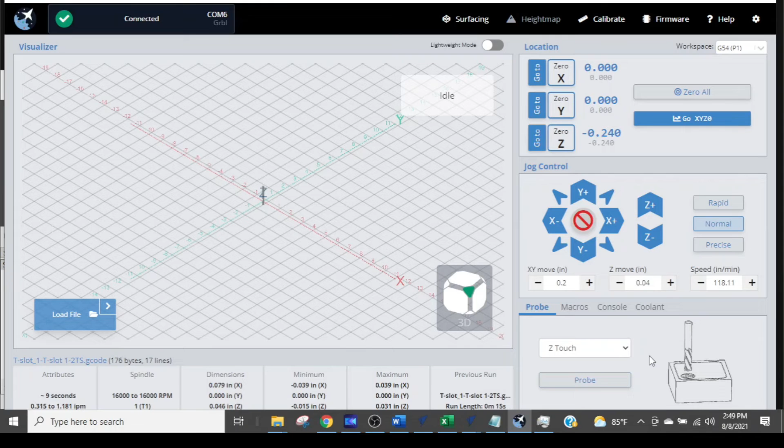In the gSender software, the probing sequence will be down in the lower right corner. This box has several tabs on it. You want to make sure you have the probe tab highlighted, with a picture of an end mill and a box there. Since we are doing the Z height, we want to do the Z touch only.

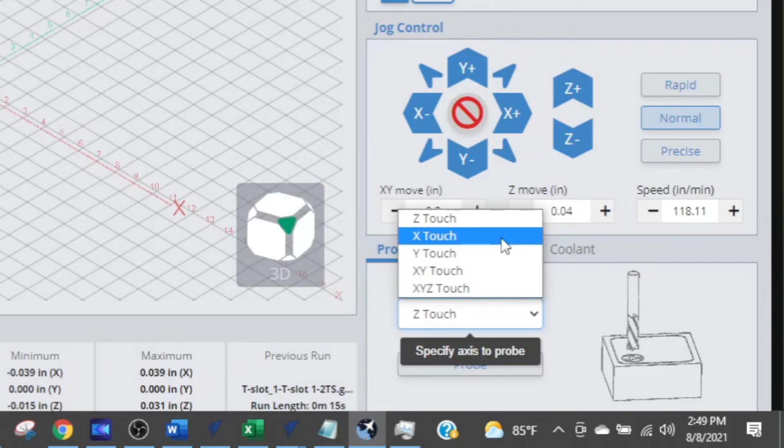When I select this box, you can see there are several selections. I'll cover this in a more in-depth video on gSender itself. When you're all set up, all you have to do is press the probe button.

However, one of the things people often forget to do is set up their other contact surface. Otherwise it will start the probe sequence and the bit will come down and keep driving into the material until the machine can't push it anymore, or it'll break the bit, or damage the touch plate.

So what the folks at Long Mill did was make a change to the program that's really cool—it actually forces you to make sure this is connected. They added a little routine at the front of the zero setting touch sequence that forces you to make sure a complete circuit can be made.

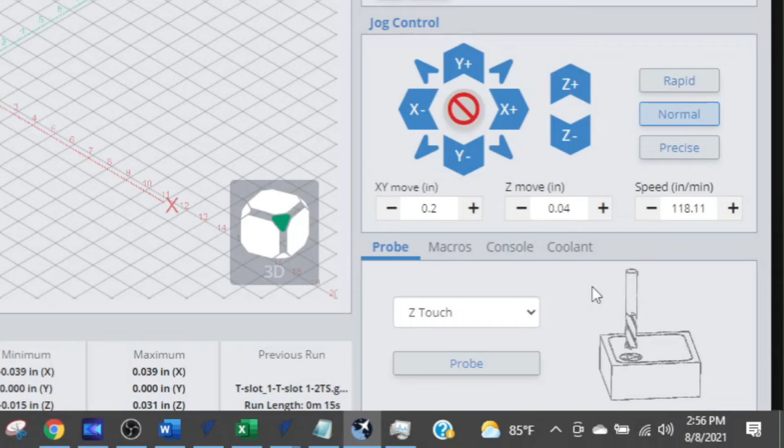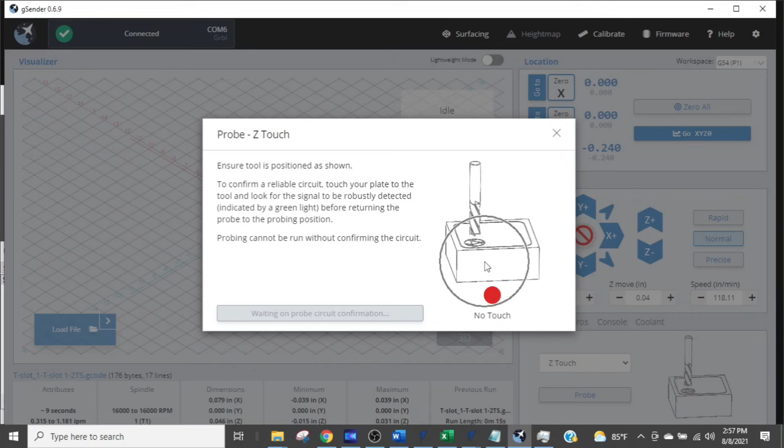So when you press probe, you're going to get this dialog box up, and it says ensure the tool is positioned as shown, and to confirm a reliable circuit, touch your plate to the tool. So basically what you need to do is pick your plate up and touch it to the bit.

If there's a complete circuit, this light will turn green, and this button will allow you to click it, starting the zeroing sequence. That means that if I did not have this connected and I touched it, it's not going to register in the software and will not let me continue.

That means I have to have this connected, and I have to actually grab the plate and bring it up to the bit. When I actually touch it, the red light will turn green while I'm touching it, and the start probe sequence will highlight. So now I can start that sequence.

Right now I'm still holding the thing to the probe. When I let it go, that turns red, but we have confirmed that we are good to go, and we can now press this button to start our zeroing sequence.

And the probe starts to move down. Now you see it's going to touch, and then it's going to come down again at a slower speed. Now we're all set up. We can remove the touch plate and the magnet and just set it aside.

In order to set our X and Y, we are simply going to nudge this down close to the material and generally eyeball the center here. This is not critical because we're making a slot back and forth, and somewhere in that slot is going to be your balance point for your picture. So it's a simple jogging of the bit to the right, a little bit forward, so we can eyeball over that plus.

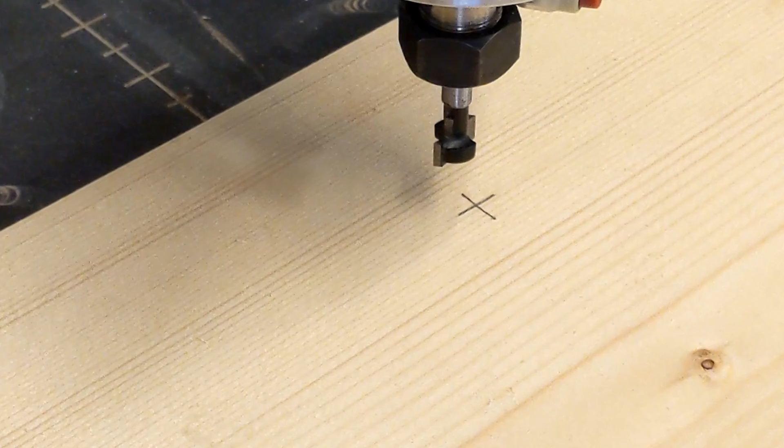So I'm pretty comfortable in the Y, not quite yet. It's got to move a little bit more. Nope, I went too far.

And there we are. Now that our CNC router bit is probed to the top of the surface of the material and we have positioned our X and Y where we want it, we simply have to set X and Y in the software. So you can see right now it says that X is about 0.24 from wherever it's being referenced at, and Y is about 0.22.

But we know that the bit is right over the position that we want it to be in. So all we have to do is select the button that says X0, and we click it and it'll turn this number to 0. Same thing with Y, Y0, we click it and it turns to 0. Now you notice a little minus sign popped up there. I don't know what that means or why. It doesn't really matter. We're still at 0.

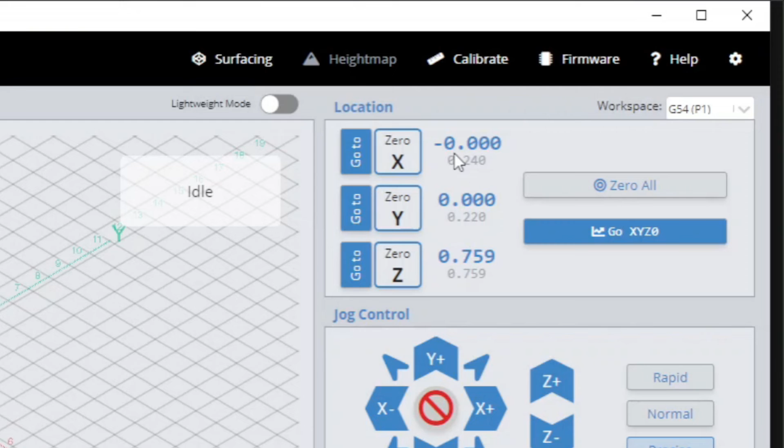Now our bit is set, and it's time to upload the program that's going to cut the T-slot.

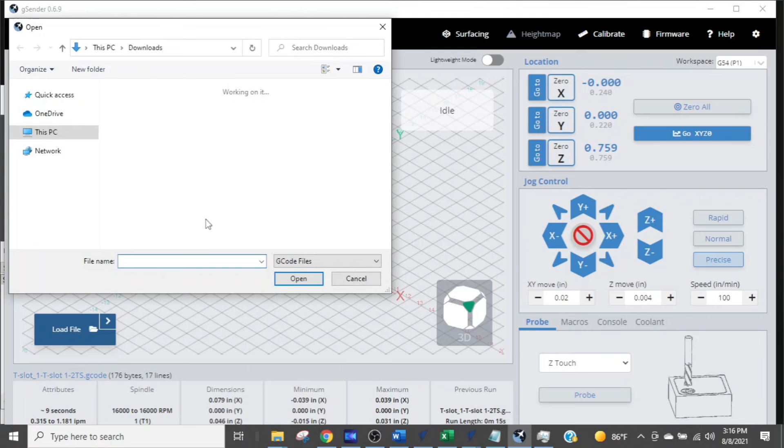We come over to this blue button in the display screen that says load file. You click that button and your directories are going to open up, and you select the file that you want. So this is the T-slot G code, so we select that and now it is in the file and we are basically ready to go.

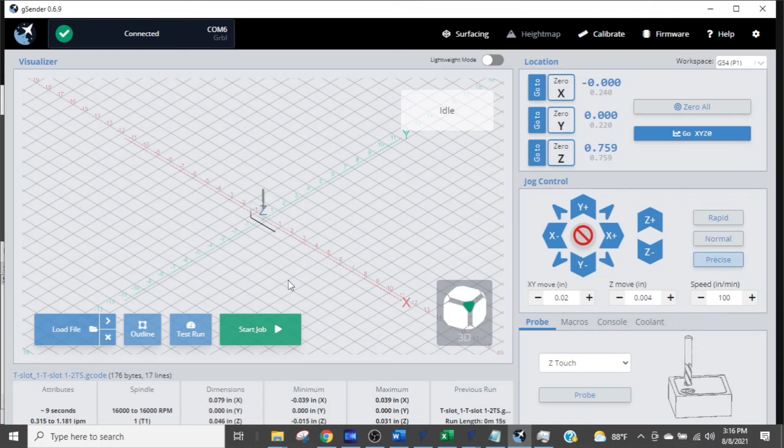All we have to do is turn the router on and make sure your project is clamped down appropriately and hit the start button right here.

And that is it. There is our T-slot.

So the bit didn't do so bad. It just won't last a long time. But the good thing about these bits is they don't get used that much, so maybe the cheap one is worth getting.